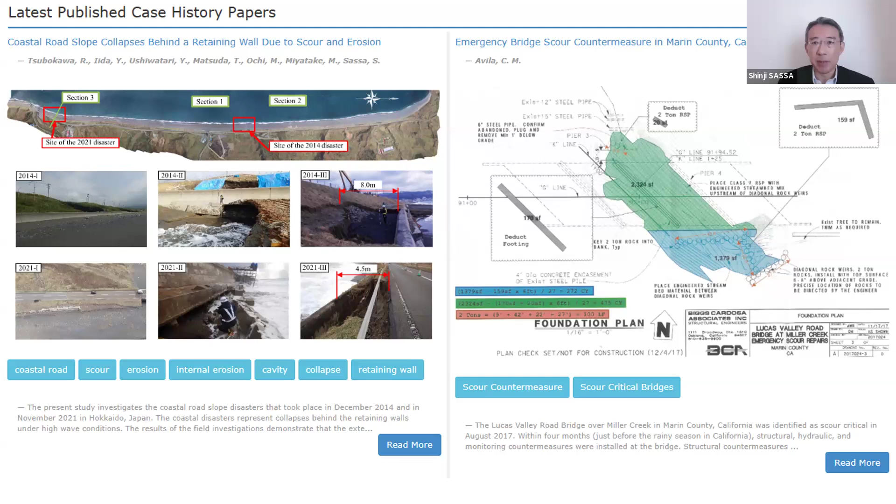Harris et al. presented scour prediction in cohesive marine soils. A hybrid approach was presented, combining field data with laboratory soil erosion testing. As for the laboratory and in-situ soil erosion testing, Mabel will talk about this topic later. This hybrid approach combining field data and laboratory erosion testing led to improved evidence-based scour estimates that benefited offshore foundation projects.

Shan et al. presented combined geotechnical site investigations, laboratory element tests, hydraulic flume tests, and advanced numerical modeling, leading to a more cost-effective design of foundations in a bridge replacement project in the USA.

For the new initiative of the ISSMGE GeoEngineers Without Borders, briefly explained in this slide, all TC members agreed and would be happy to contribute to this new initiative when such incidents occur worldwide pertaining to scour and erosion. Is it okay, Marc?

Yes, okay. So the idea—yeah, and this is not only for you, but all our viewers and all the TCs, hopefully they're watching.

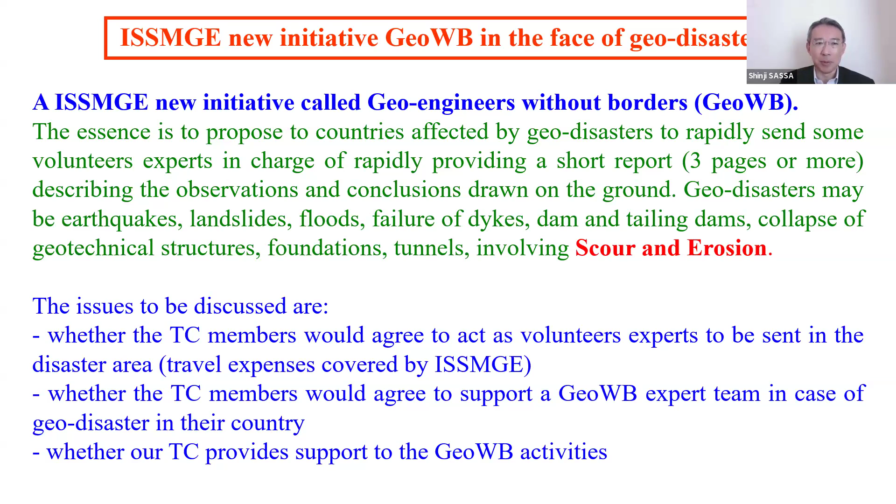Thank you, Mark. I would now like to talk about some recent advances in the mechanics and countermeasures of scour and erosion from my own keynotes that took place in September last year, and also former ones.

Here I'm showing the effect of overflow and seepage coupling on scour. Tsunami, overflow, and seepage coupling actions induced scour of the mound of caisson breakwaters, as well as the seabed ground, causing bearing capacity failure, leading to flow of the mound, and resulting in total failure of the caisson breakwater, which otherwise remained stable without the coupling effect.

Without seepage, overflow-only induced scour did not lead to destabilization of the breakwater. However, the coupling actions of seepage and overflow led to total failure of the breakwaters.

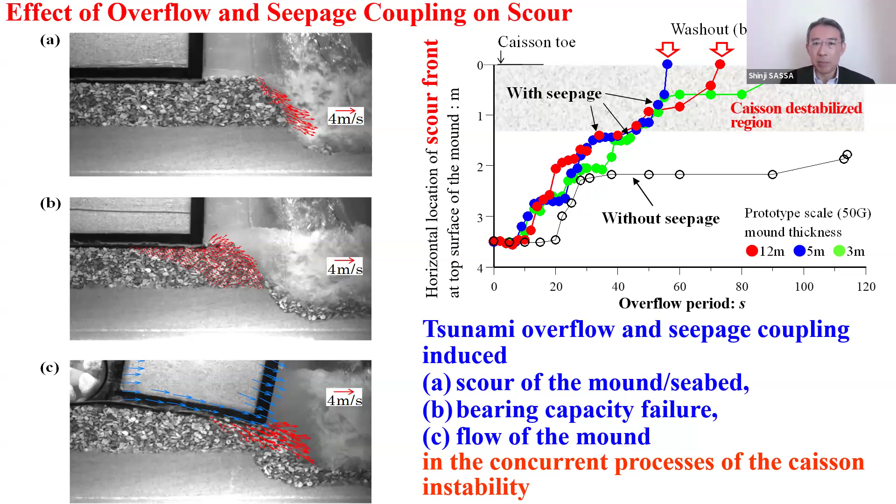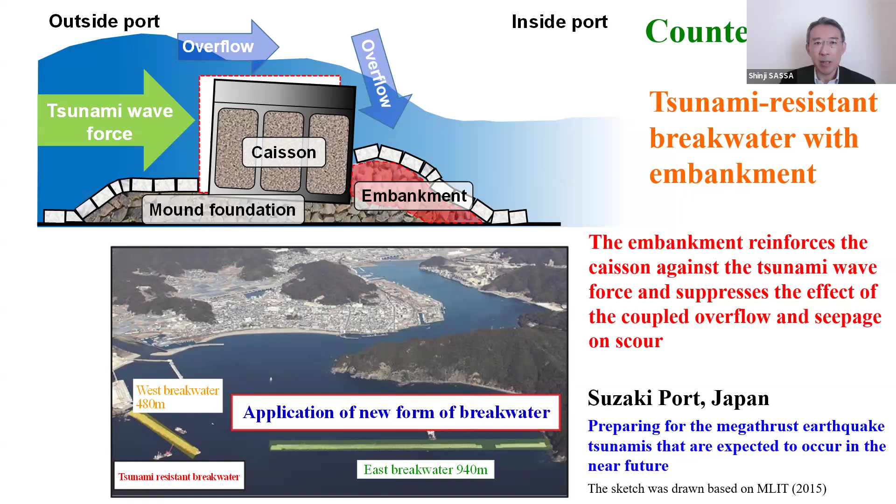Such new knowledge has been utilized for the design of tsunami-resistant breakwaters with embankment, where the embankment reinforces the caisson against the tsunami wave force and substantially suppresses the effect of coupled overflow and seepage actions on scour of the breakwaters. Such structures are for preparing for the megathrust earthquake tsunamis expected to occur in the near future, particularly in Japan, and also in the Pacific Ocean.

Erosion research has led to a groundbreaking discovery on fundamental soil mechanics, that is porosity of sands. Sand relative density normally changes from 0 to 100%. Here, the dynamics of suction at waterfront areas subject to cyclic exposure and submergence undergo a remarkably wide range of sand porosity evolutions—over 200% variation in terms of relative densities achieved, ranging from very dense to very, very loose, such as giving rise to bubbly sands seen across the globe, as shown on the left of this slide.

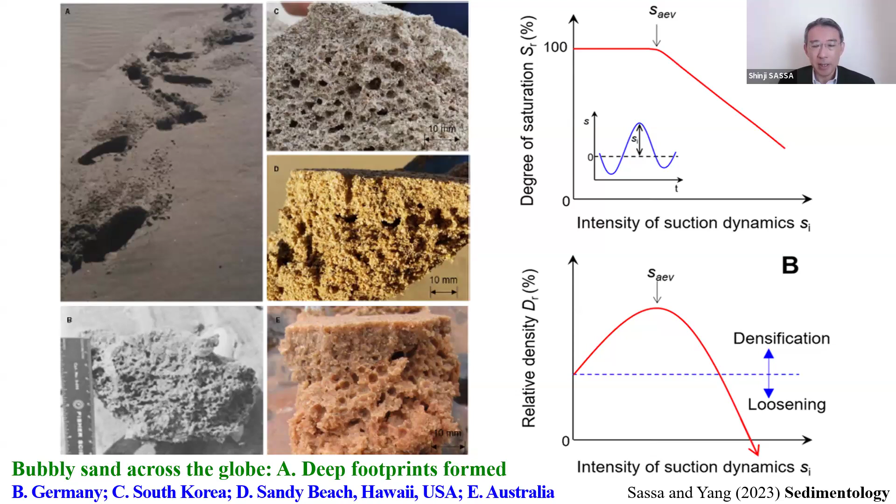Such new knowledge has also been used for novel engineering design of coastal land reclamation. The top right figures show that, in the 3 months following reclamation, the coastal reclaimed land underwent dynamic movement under waves and currents.

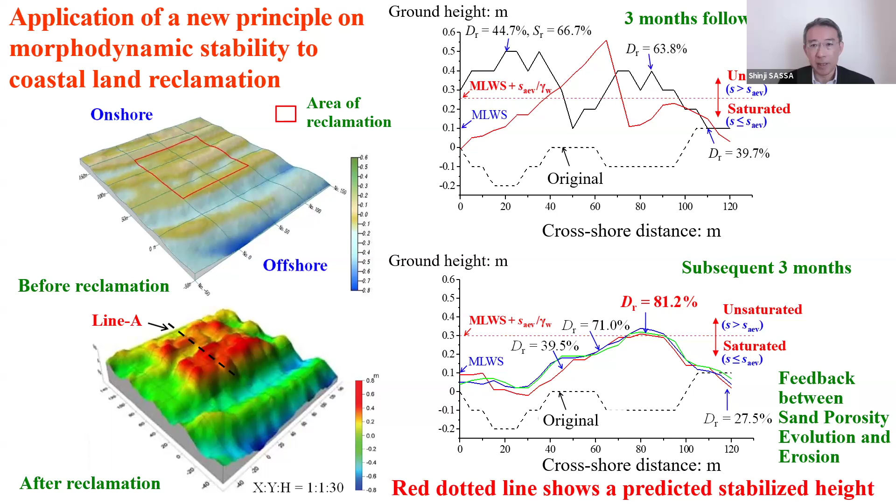However, the situation substantially changed in the subsequent 3 months: the coastal reclaimed land became distinctly stable, owing to the feedback and interplay between sand porosity evolutions and erosion. The red dotted line shows the predicted stabilized height based on the developed analytical framework, which accounts for the interaction of such hydrogeodynamic effects and processes, shown to be consistent with observation.

Another important facet of scour and erosion is internal erosion. Here I'm showing cavity collapses seen across the globe behind seawalls. The photograph on the bottom left shows the site of a fatal accident where a cavity formed in the backfill behind the caisson and suddenly collapsed without giving any alarming signs at the soil surface, leading to a fatal accident on site.

So the prototype scale visualizing system allows us to...

Can you go back one slide? One slide, okay, this one? Okay, yeah, they look like sinkholes.

And look what I noticed. If you look on the left picture at the bottom, you see one. The depression happened at the joint of the caisson. The caisson joint has some defect, and through this caisson joint, sand migration occurs.

Then the cavity develops above the groundwater level because the sands are inherently cohesionless, so no suction, no cohesion. But above groundwater level, sand has apparent cohesion due to the development of suction, so a cavity can stand by itself above the groundwater level. So the cavity gradually grows and develops around until reaching about 2 or 3 meters, then sudden collapse.

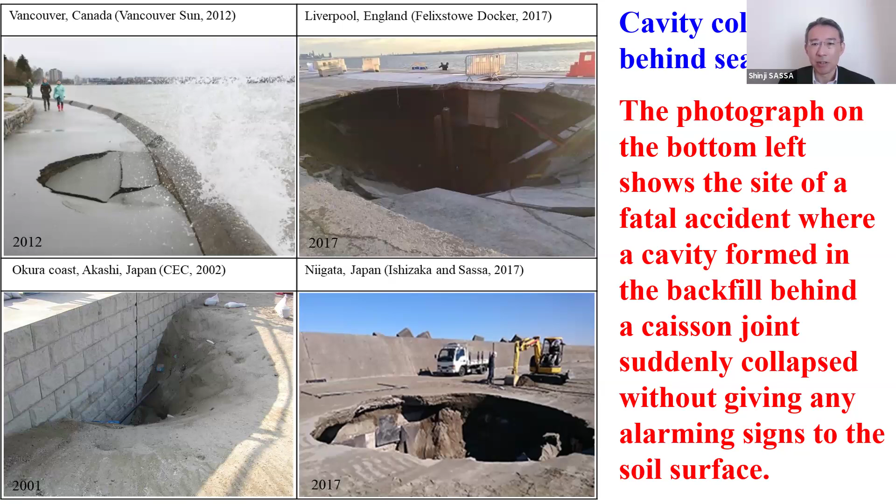And it suddenly collapsed without giving any alarming signs to the soil surface. So the fatal accident occurred. This occurred worldwide recently, so I'll touch upon it later.

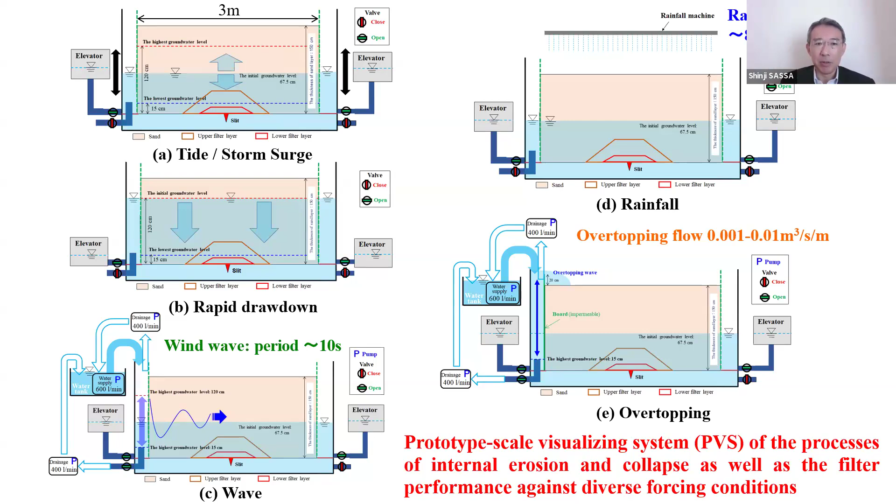For such incidents, the prototype scale visualization system allows us to see the cross-sectional view of the entire soil, including the cavity, and to investigate the simultaneous processes of internal erosion and collapse, as well as examining the performance of countermeasures such as filter layers against diverse forcing conditions involving tides, storm surges, rapid drawdown, waves, rainfalls, and overtopping.

This led to novel filter criteria for preventing internal erosion against dynamic forcing conditions. The criteria have proven effective in ensuring the safety of important infrastructures such as airports, revetments, quay walls, and sea walls, as well as sandy beaches, both natural and artificial, that led to recent fatal incidents worldwide.

But these filter criteria have suppressed and prevented the occurrence of such collapses under diverse forcing conditions that involve waves, tides, seepage flows, seismic motions, overtopping, and rainfalls. So in our TC, the cross-disciplinary integration of hydraulic and geotechniques has indeed played a vital role in advancing the field of scour and erosion, which pose significant risks to infrastructures as well as to human beings.

That's all for my summary of our TC, followed by the three eminent researchers. That's all for my talk. Thank you.

Mark, do you mind if I pose a question? Okay, yes, of course, go ahead. Yeah, of course. Hi, Shinji.

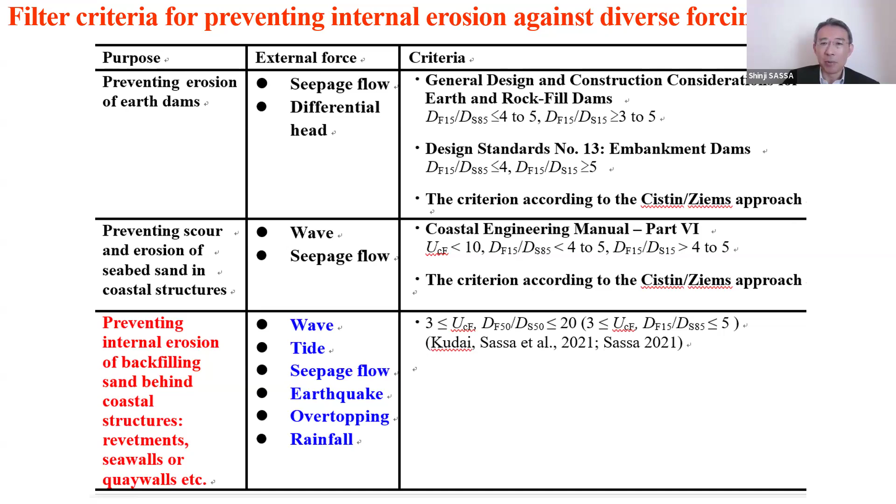This was published in Coastal Engineering in 2021. So, Tiago, you can have a look at our paper that was published in 2021 in Coastal Engineering.

Yeah, because it could be interesting, for example, in a lot of the studies we do on the filter interaction with the upper armor layer of scour protections, and particularly in those riprap solutions, because often we have a lot of problems of filters. Please have a look at the 2021 Coastal Engineering paper.

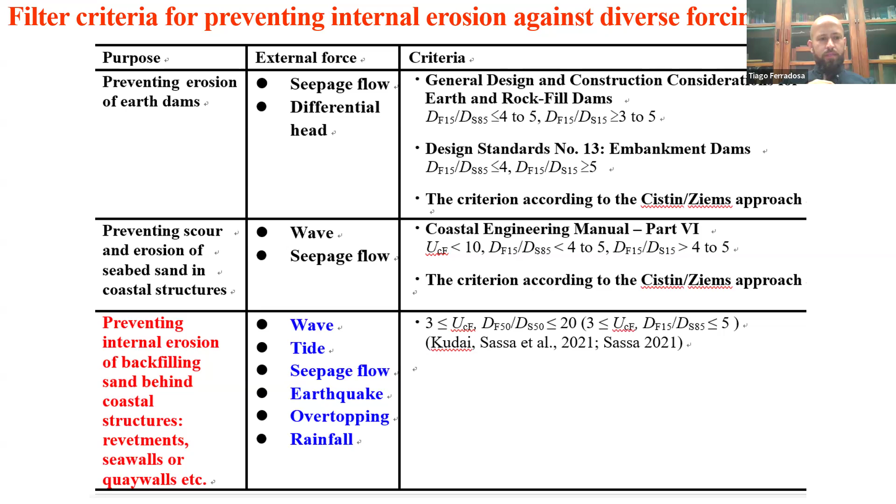Very interesting, thank you Shinji. Thank you. This is very nice, Shinji. I'm impressed by how active your technical committee is.

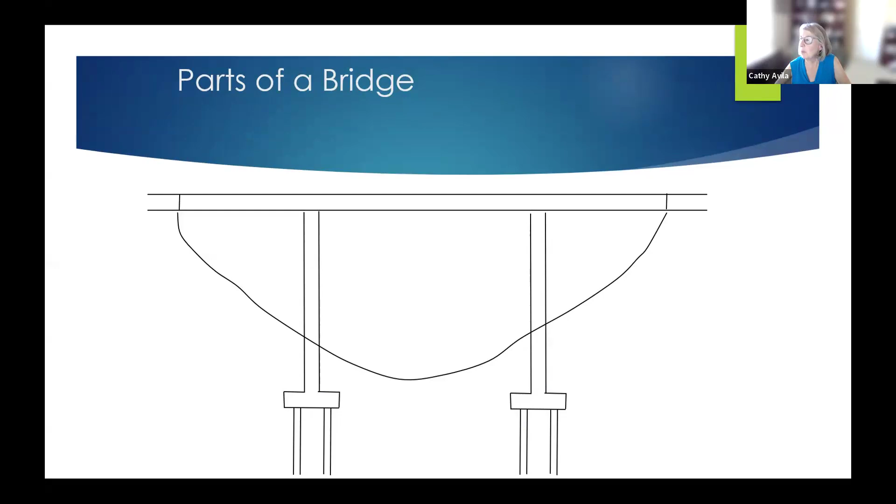We'll just talk about the parts of a bridge. So we'll start out with here's the deck, the pier, the footing. Sometimes we have piles, sometimes we don't. Generally we call it a spread footing, not on piles, but sometimes they'll just call it a footing. This is our abutment 1, pier 2, pier 3, abutment 4. That would make that span 1, span 2, span 3.

So now that we're all bridge engineers, we're going to talk about abutment and abutment washouts. If we look here at the abutment on Interstate 10, what we call Tex Wash, we can see an abutment scour failure. This bridge actually had quite a bit of rock riprap around it protecting it, but the abutment was founded on spread footings on alluvial material without any piles underneath it, so it had some vulnerabilities. This fell down probably about 5 years ago, and all the bridges on I-10 that had similar features are being retrofit at the present time.

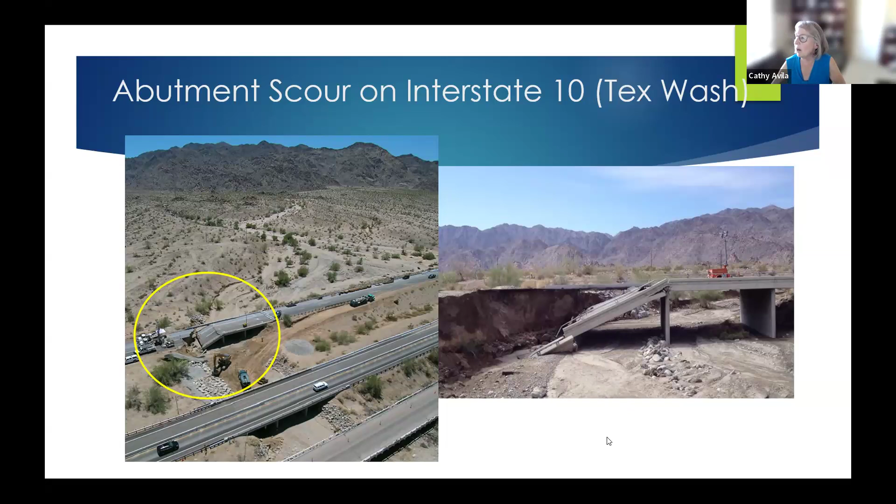I'm going to talk mostly about the atmospheric rivers that California experienced in March of 2023, and specifically I'm going to look at a couple of projects in Tulare County. Tulare County's down here. If we looked at Fresno, that is the centroid of California. If you kind of put your finger up on a map of California and spun it around, you would see that the literal center or centroid of California is somewhere in Fresno. So we're just a little bit south of there. In general, Tulare County has 2/3 of its area in very mountainous areas and about 1/3 of it in flat land, a very big agricultural area. This shows a map of the damage sites that occurred in that March storm event.

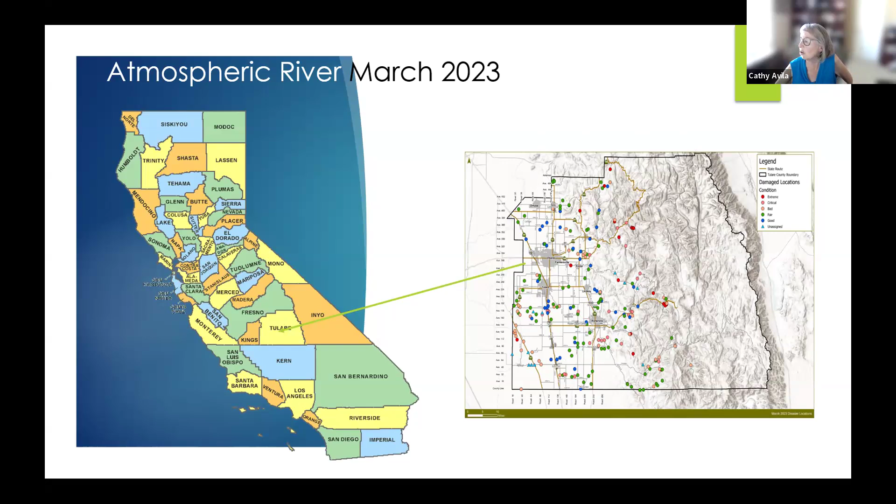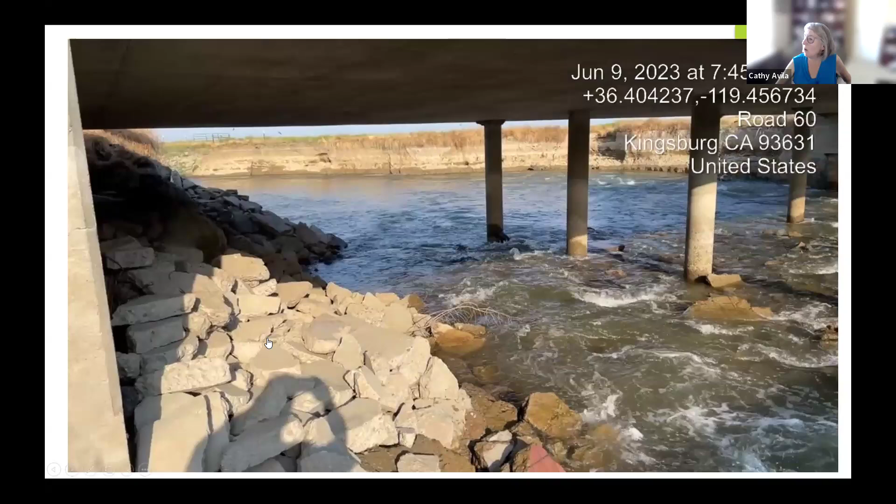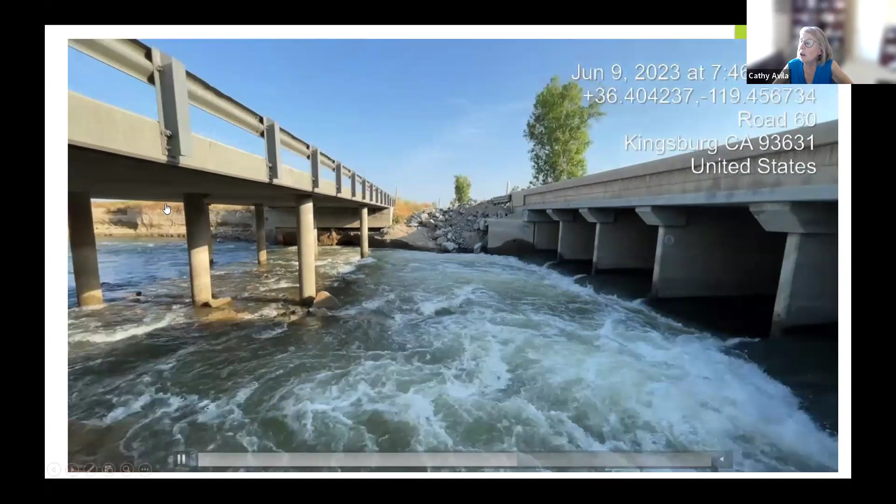Going to start with the Road 60 on Cross Creek. We're almost to the flatlands here with Cross Creek. If we show a quick movie, what we see is some broken concrete riprap over here at this abutment. But let's look at the opposite abutment, because that's the interesting one. So if we zoom in here, we see these abutment piles, and we see the erosion going on along with the almost vertical embankments over here.

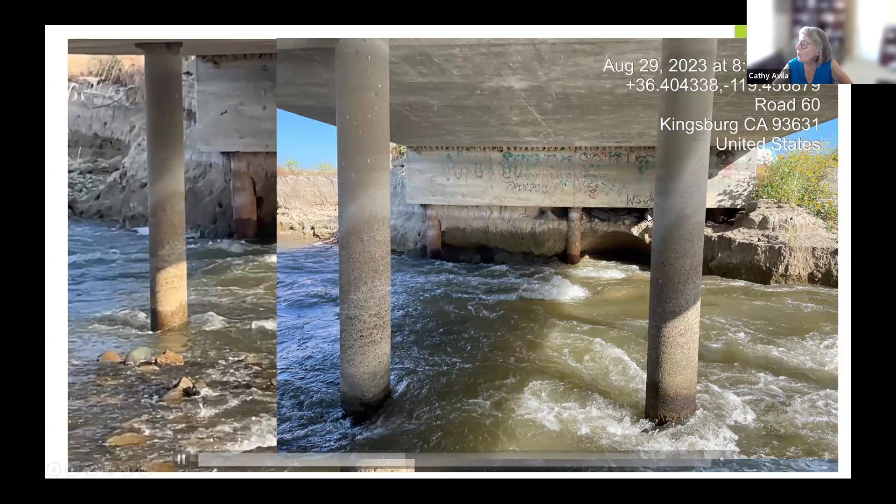What did we do about that? Well, here's a nice still photo after the event had stopped, and we see the piles, but we also see something quite alarming out here, where we can see some daylight under here. And as Dr. Sassa just talked about, sometimes you get some catastrophic failures that you can't see. This was fortunately a case where we did not get a catastrophic failure and we could see it. So this is somebody standing on top of the ground up here. You never want to see cutouts in your asphaltic concrete. You really don't want to see big cutouts in your asphaltic concrete.

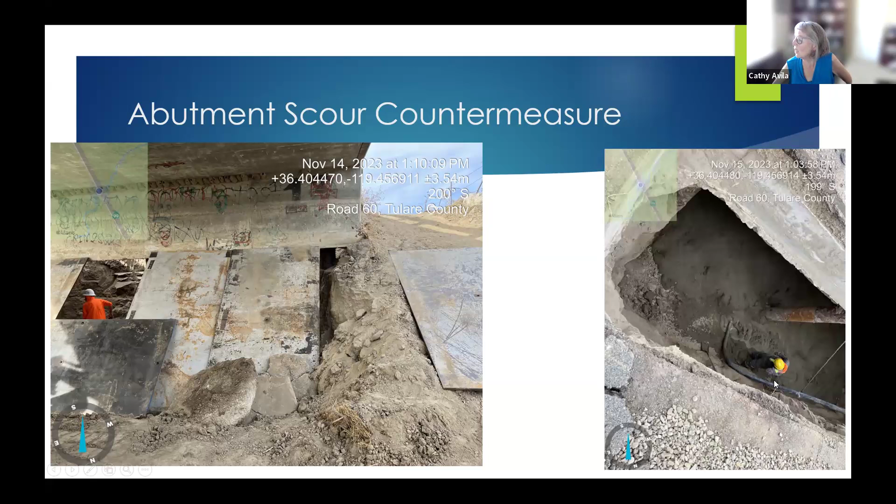Here's the piles that are going down, and you can see the water. They shut down the road and did a scour countermeasure. We can see our person scale here. They put some plates on to a slope, and if we look down, we can see our person scale here. They floated some concrete. There's our pile underneath that abutment, and here it is as it came up. And finally, when all was done, they pulled the forms, and we had a pretty robust abutment scour countermeasure.

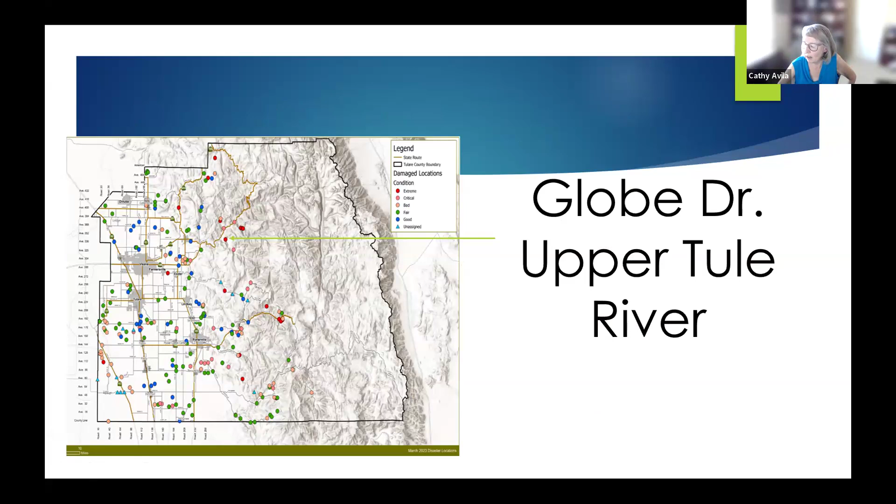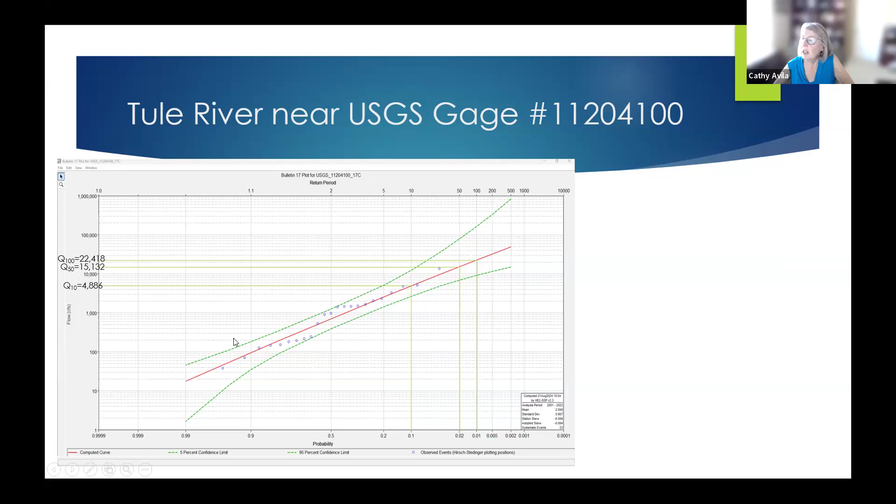The next one we're going to look at is going to be Globe Drive. This is the Upper Tule River. Get an idea of what kind of recurrence interval we had for this event. We looked at a 17C plot of the gauge, and what we found was that there was 13,400 CFS that occurred, peaked in March 10th. For those of you who don't speak English, that's 380 cubic meters per second.

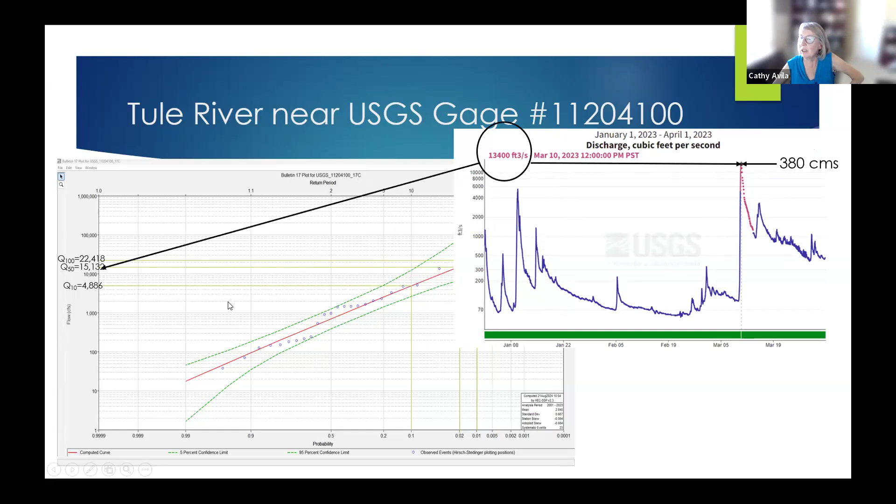And that was just under a 50-year event for that particular gauge. So we're not talking necessarily a really huge event, but nothing too small either.

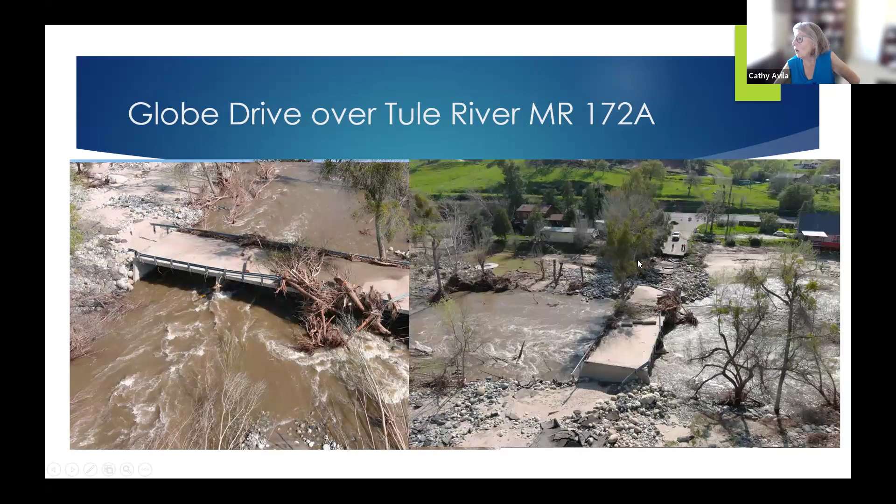Are those roadway embankments still vulnerable to scour? Yes. But in general, there's not a very large ADT out here, average daily traffic. So when there are large flood events, people don't tend to be on the roads out here.

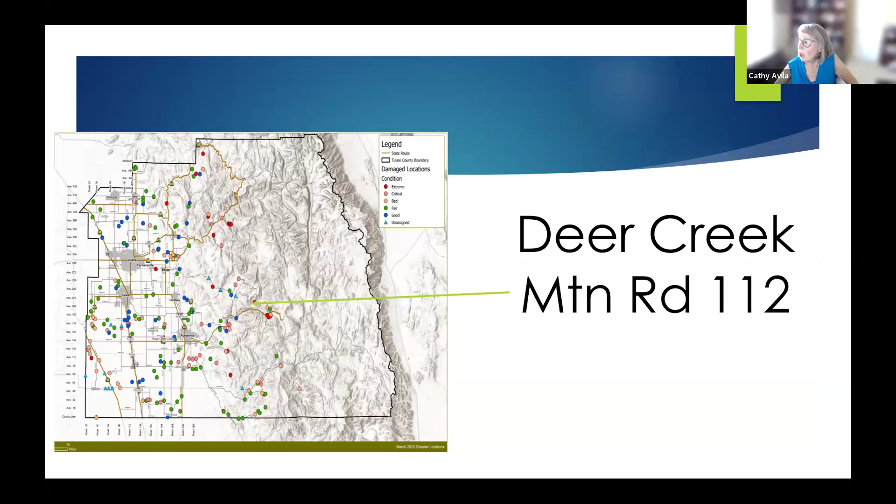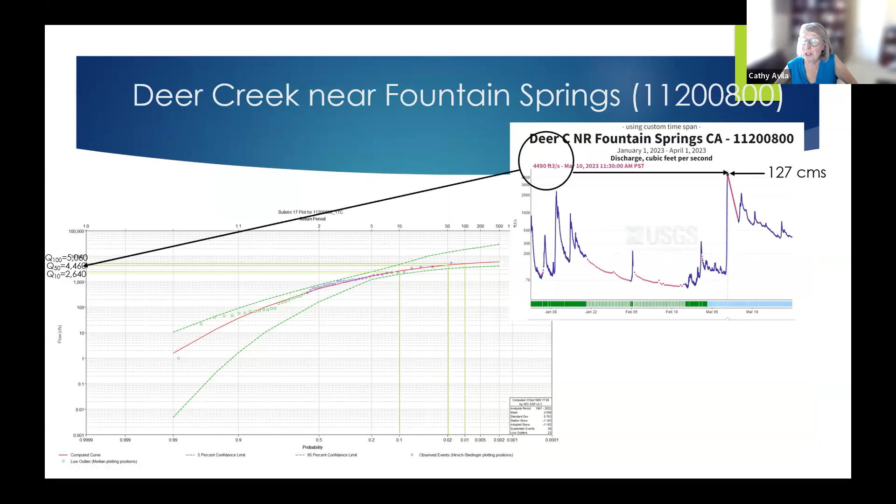Third example, Deer Creek on Mountain Road 112. Again, we had the joy of having a gauge out here from the USGS. About 4,500 CFS was our peak, 127 cms. That really was a 50-year event. So we're finding that at least up in the mountains, we had about a 50-year event.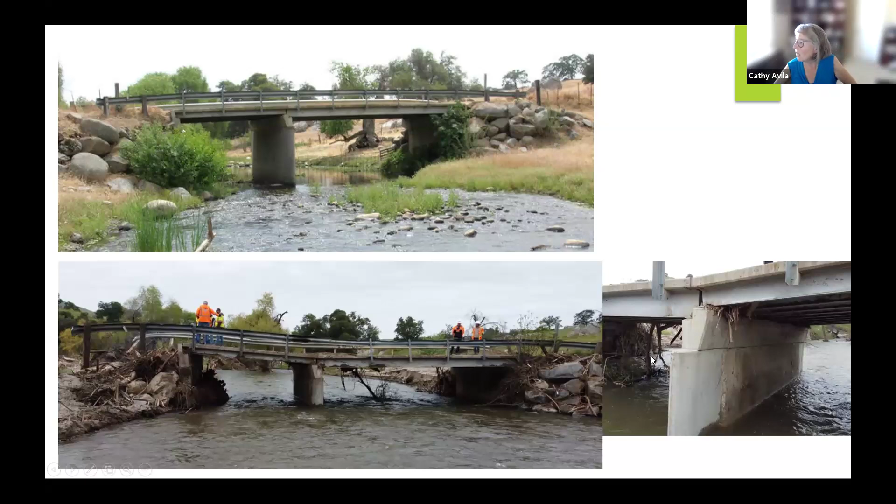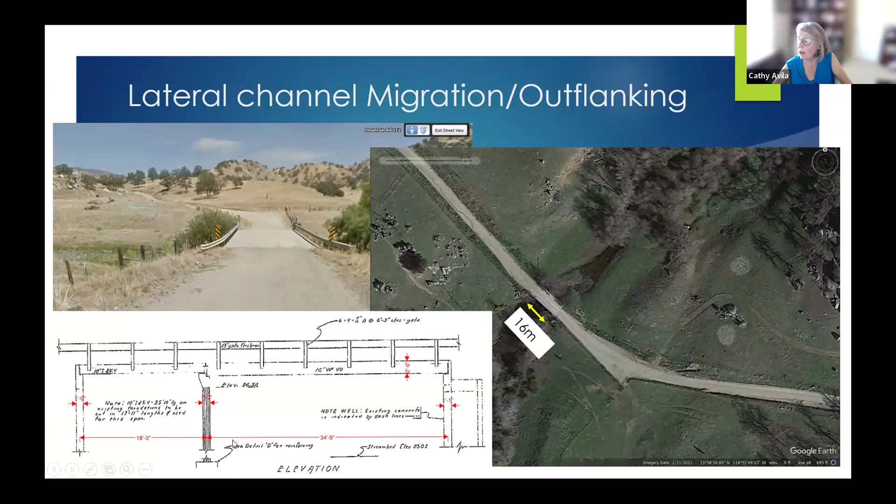This lovely bridge here is a 2-span bridge, span 1, span 2, and it didn't look so good after the flood event. If we look, we can see that deck looked pretty cattywampus after the flood. So we had some pier scour. But the bigger challenge, looking at this not-very-long bridge in plan view from Google Earth, we see it was 16 meters for the old bridge. And that old bridge had a pier founded on alluvial material, nothing bedrocky about it.

And here's what it looked like after the flood event. That went to a 67-meter wide channel. And maybe because there was some debris caught up in the bridge, it outflanked it. We don't know for sure.

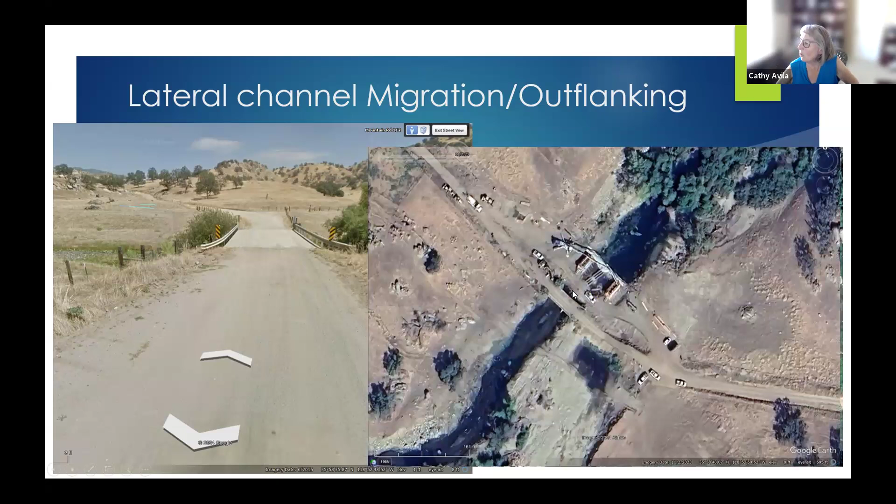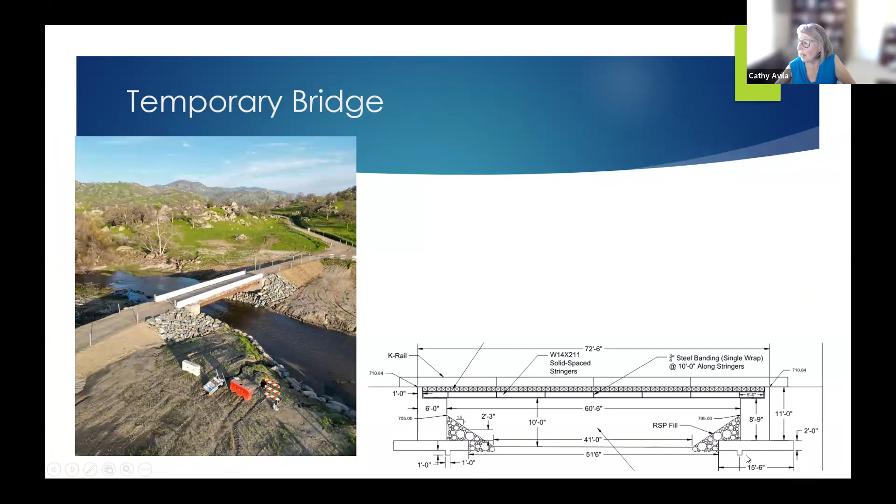There was a temporary bridge that was put in, only 18 meters. That temporary bridge looks like this. We can see some rock riprap around the embankment. If we look at the as-built plans for that particular bridge, we do see that it does have spread footings without being on any piles. So it has some vulnerabilities, but it is a temporary bridge, not expected to stick around for a heck of a long time.

And we also see that the channel and roadway profile coming up to it, the embankment fills which you can see here, are blocking the flow and causing a bit of backwater upstream, more on this side than that side.

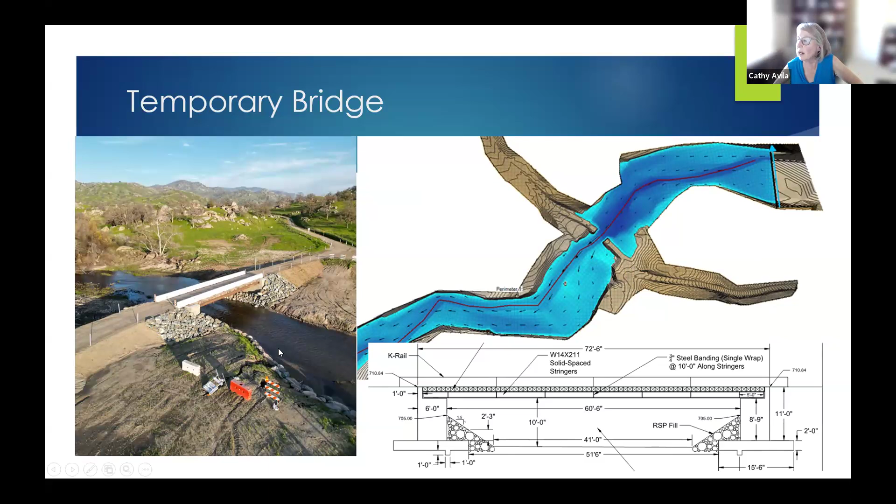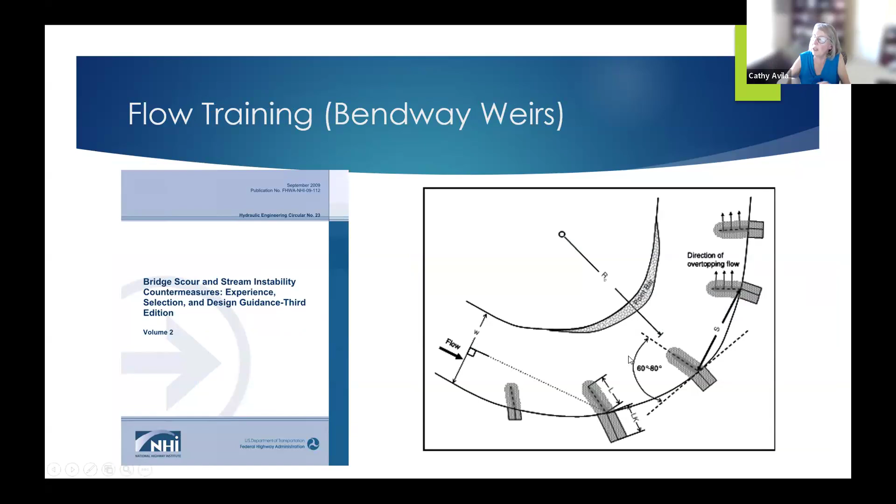There's been a lot of excellent guidance put out by the Federal Highway Administration, FHWA, on protecting abutments from scour. Riprap has been the historic approach. Also looking at flow training works, bendway weirs and the like, in order to try and convince Mother Nature to go in the direction we want her to go in and not outflank the bridge. So that looks like that in real life.

There are 3 publications used for scour in the US, and I know they're also used outside the US. Those are actually being updated, so we're looking forward to that. First, the 2012 publication of HEC 18, Evaluating Scour at Bridges. This is going to be the last one to be updated. I understand it's about a year out from being updated.

The 2012 version of HEC 20, Stream Stability at Highway Structures, should be updated next or shortly. And finally, HEC 23, Bridge Scour and Stream Instability Countermeasures. That one has already been updated. Some advanced copies have gone out, and that should be coming out to the Federal Highway Administration's website, which you can use to download any of their publications.

I don't know if you guys have any questions.

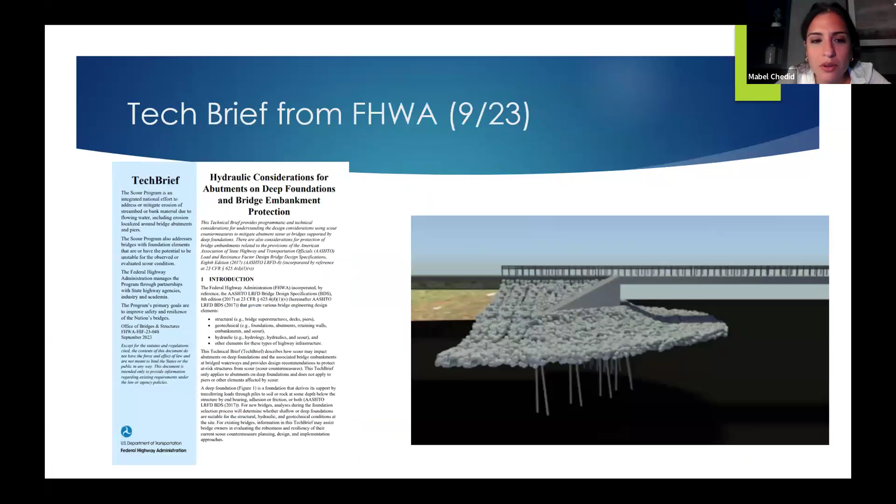Cathy, I have one question. The Road 60 in Tulare County, when we saw the daylight behind the abutment, was that a slope stability failure of the embankment?

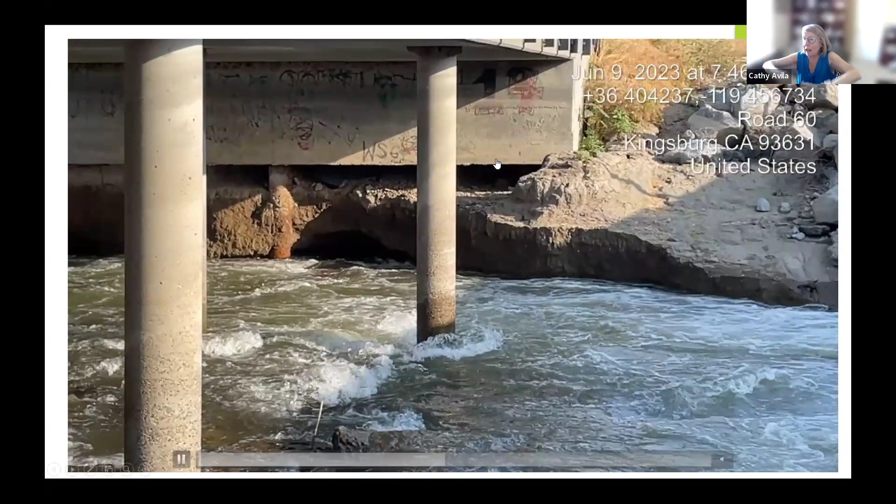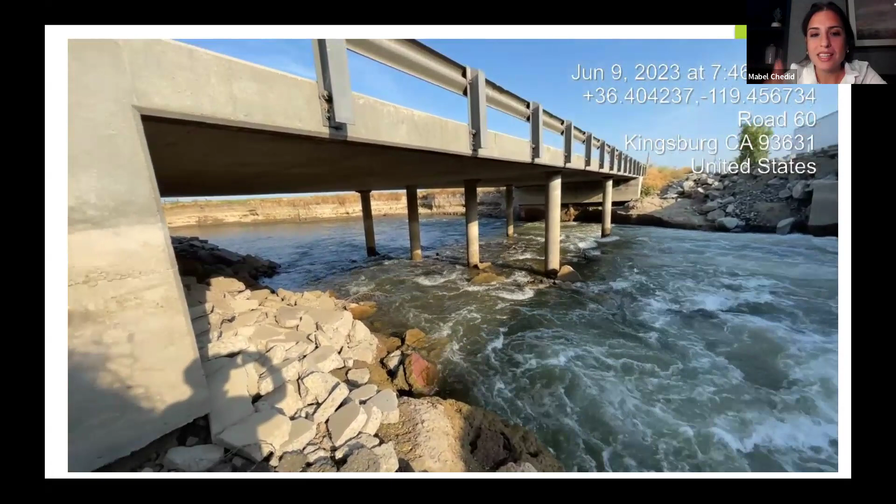I think it was more of an erosion failure. If we look at the movie, what we actually see is erosion, Mother Nature eating away from the bottom, and then basically you're eroding the toe, dropping that soil in, eroding the toe, dropping the soil in again.

It's a type of local stability failure, because eroding the bottom means increasing the height of the embankment and making the slope steeper, so it would slough and you'd lose big chunks. That's very interesting. Cathy, thank you so much, you and I connect by being both practitioners, so I really like your examples.

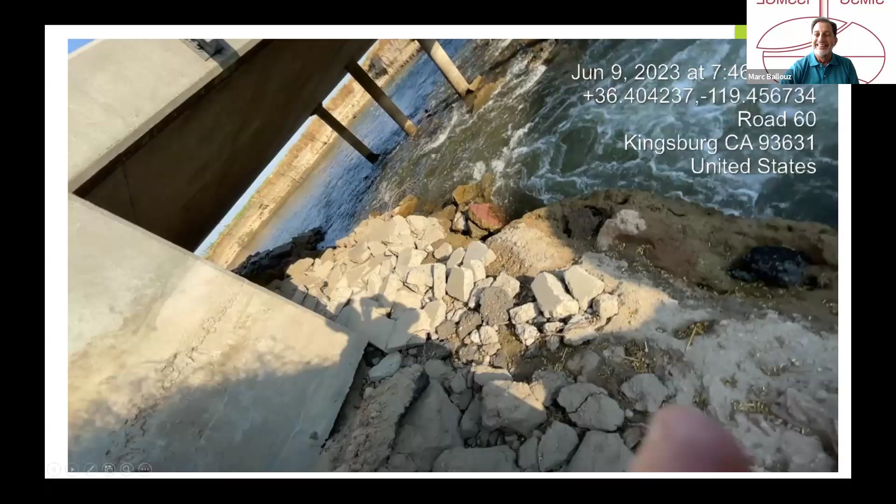Hi again, Marc. Let me check if I can share my screen. Share your screen with big slides. I guess you're seeing them now, correct? Perfect, yes. Sorry, you guys, I lost my slide here. Why aren't... should you start from the beginning? You're starting with the last slide. Apologies, Marc. They are the same slides. Okay, thank you. There you go.

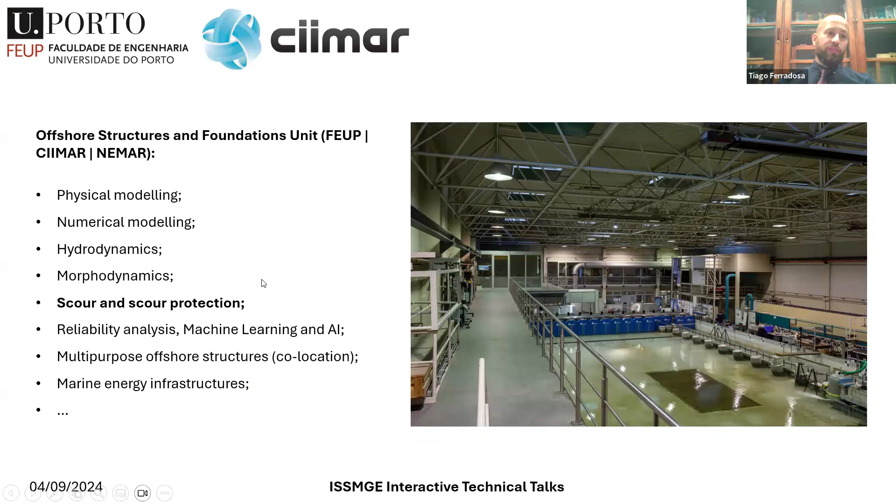Now, here we go. So we are the NEMAR group, the marine energy group. The scour problem, as Shinji already pointed out, is a mixture between geotechnics and hydraulics. We deal a lot with hydraulic problems, one of them being scour and scour protection, with a lot of physical modeling and numerical modeling, including for industry applications, but also in research and academia.

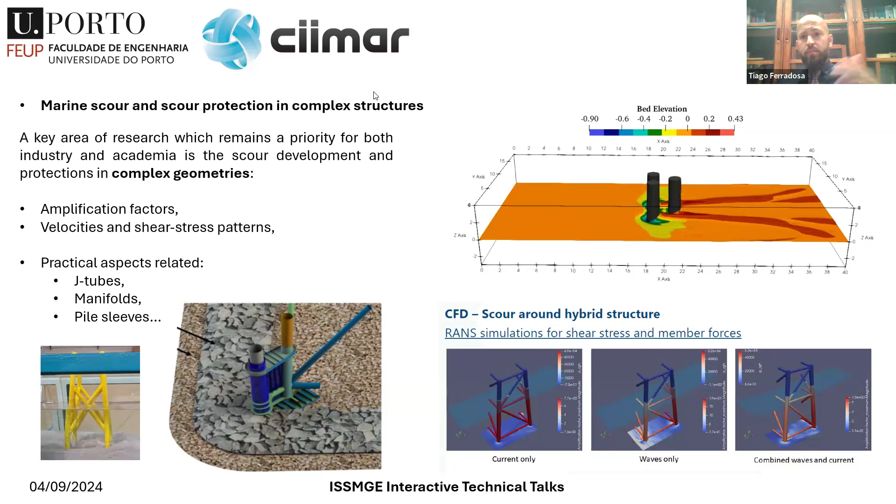One of the challenges that remains key for the upcoming years is complex geometries. This is important because with the growing offshore wind market, the novel marine energy structures being placed at sea, or at least studied, and demonstration projects on such structures imply a lot of complex geometries. When you jump into complex geometries with complex flows, combination of waves and currents, tidal velocities, and so on, it becomes really difficult to make predictions on scour and to understand the problem itself. This would be one of the challenges I'd point out, with major developments still to be made in the upcoming future. This includes J-tubes, pile sleeves in jackets, crossing cables, manifolds, so you can imagine all these structures with complex geometries and complex flows.

Why is that a big problem? Because unlike the methodologies published for bridges and so on, in offshore engineering the methodologies, norms and standards for scour still lack development on a lot of these tricky situations. We know a lot about scour on monopiles, how to deal with them, etc. We try to convert a lot of these complex cases into equivalent monopile cases, using factors to account for the transparency of the structure, or trying to account for the amplification factor that might be higher than in a simple monopile, but there are no set-in-stone rules, if one can say so.

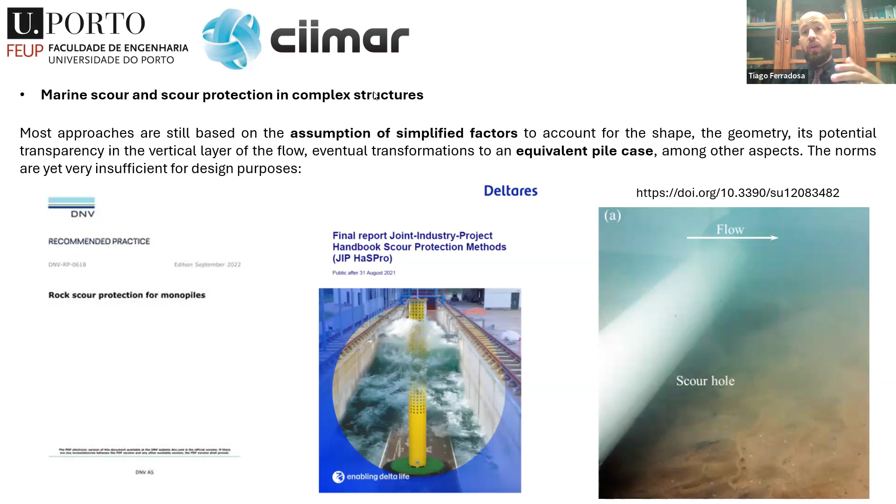It's a bit of a gray area where the designer's experience is worth a lot, and physical modeling is required. This remains a big problem, and the challenge of complex geometries and complex flows is very much the basis of the need to advance standards and norms. We apply a lot of knowledge from fluvial environments, but it's still not enough to account for all the problems. With the growing situation in offshore wind, but also aquaculture in offshore locations, tidal energy, wave energy, we start to put more and more structures in place.

We start to look for co-location of these structures, perhaps aquaculture with offshore wind, or wave energy with offshore wind. This means we have moving elements around fixed or sometimes floating foundations, where the cyclic movement of the cables can induce liquefaction or increase scour at the anchors, depending on water depth. If it's not too large, that scour can be neglectable.

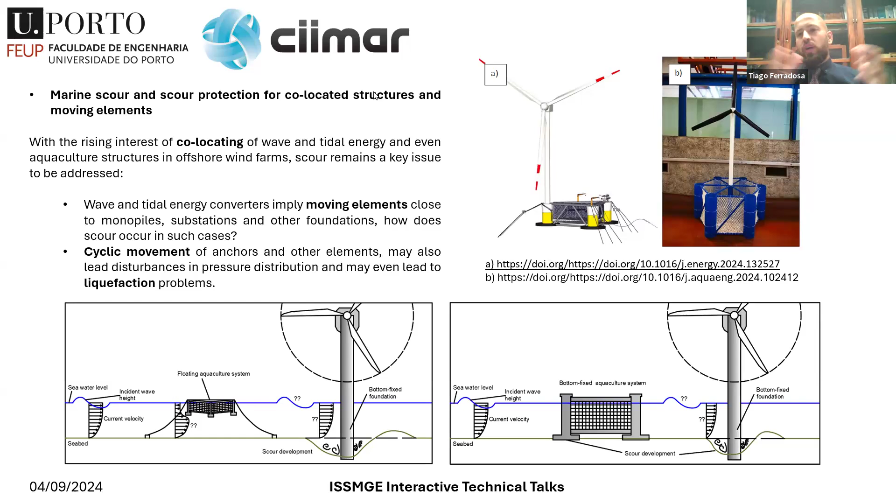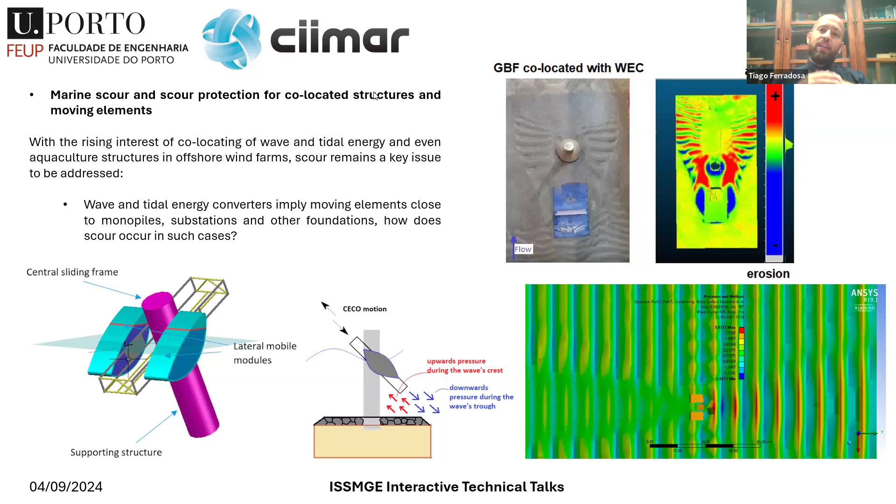With this increasing complexity and added co-location of structures, scour becomes a huge problem. One of the most recent cases we studied is the combination of wave energy devices located at the bottom, and how the scour patterns and amplification of shear stresses may change around the monopile for an offshore wind turbine or gravity-based foundation, how the pressure or velocity columns in heights can change, and how pressure can change upon the armor layer. All these things pose numerous uncertainties on top of the problem, so that remains a key challenge.

Additionally, to make it more complex, we want to look for novel concepts for scour protections. Why? Many are related to the need to enhance biodiversity, some relate to avoiding plastic systems to prevent microplastics at sea. For example, we want to protect a structure from scour using artificial seagrass, but made more eco-friendly, with eco-friendly materials and shapes. All of this changes roughness, interactions with flow, geometry, and material. These novel concepts, though some proved useful and nature-friendly, are still very uncertain in their performance. This is another challenge we still have a lot to do on.

If you want to look at recent developments and novel concepts on this, the paper we present below provides a summary, a very recent one.

We also need a lot of physical modeling to study these complex situations, to quantify damage at scour protections. But to quantify damage, we need better methods, new techniques, better testing—so another challenge is the actual quantification of damage. Here's a small example where we look at ripraps with dynamic equilibrium, which can have a little movement, but not so excessive that it exposes the filter layer. This methodology was introduced by Den Boon some years ago. The criteria was that filter exposure could not exceed the equivalent size or area of a 2x2 stone square for the armor layer.

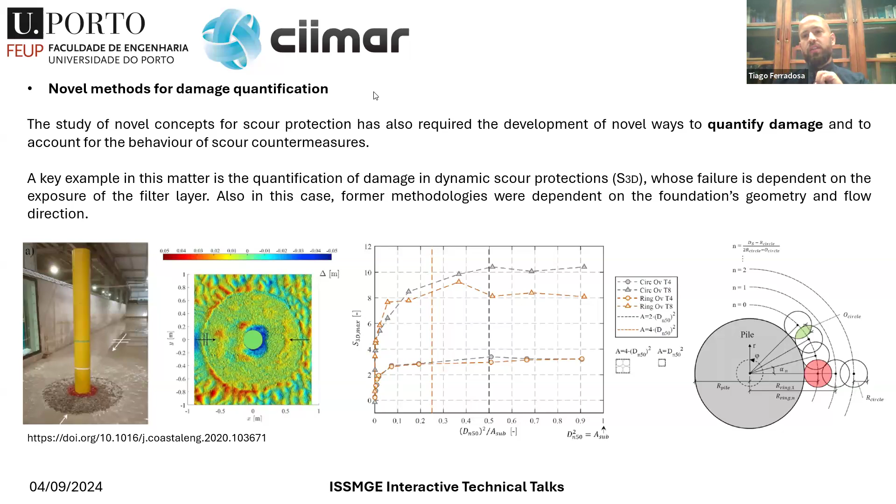We recently developed and have been studying this method. It has a probabilistic background combined with physical modeling that actually proved the visual criteria introduced in former days was correct—the damage evaluation at dynamic scour protections, the failure criteria, tends to stabilize at that value. This means there is still a lot to be done concerning academic research on methodologies to quantify damage in physical models, which we often use for industry offshore engineering cases.

For the design itself, we keep struggling to improve our design and the norms. A key area of research lately has been probabilistic-based design methods. What's the problem? Scour is such a random process, and scour protections like riprap are so random in nature that it's not the same as designing a concrete slab or a pile where you know the resistance is X and the momentum shall be Y or Z. For such a random process, it's very difficult to provide probabilistic-based design methods, but this has been a key research area—still early, but developed a lot lately with AI models, machine learning techniques, and so on.

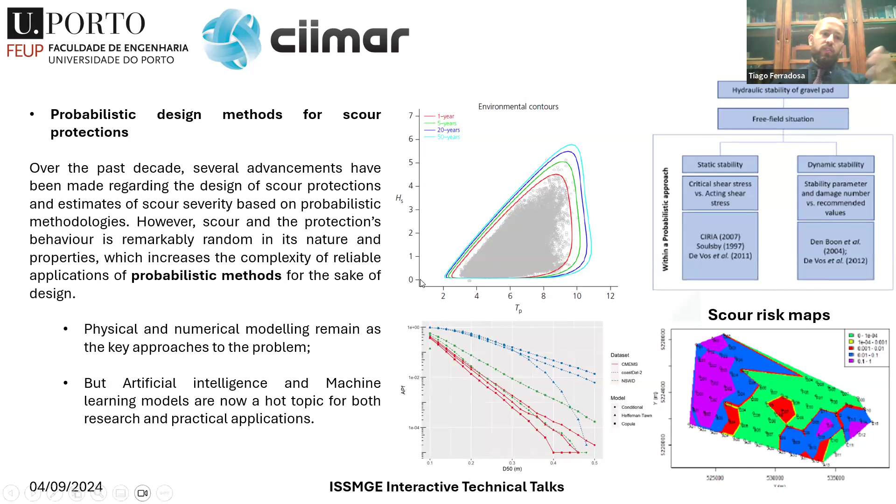Still combined with physical and numerical modeling, there have been recent contributions on the relationship between the probability of failure of a scour protection concept and the variables that control the scour process and mechanism. In some cases, we can even use those methodologies to develop scour risk maps, as you would do for a set of bridges or piles, or for offshore wind farms, wave energy farms, or aquaculture farms—any structures placed at sea repeatedly in the same location. That's another challenge that could prove quite useful in practical applications.

Another area that's been developed a lot lately is the study of the interaction between the soil, the structure, and the flow, but also the scour protection and the structure itself, including the flow. The way the scour protection can add or change the stiffness at the interface between the soil and the structure is something we've seen a lot over the last three to four years in offshore engineering research. There are even studies on how scour protection may add stiffness to monopiles, resulting in more vibration in the natural frequency than expected. So there's a lot to be done in this matter as well.

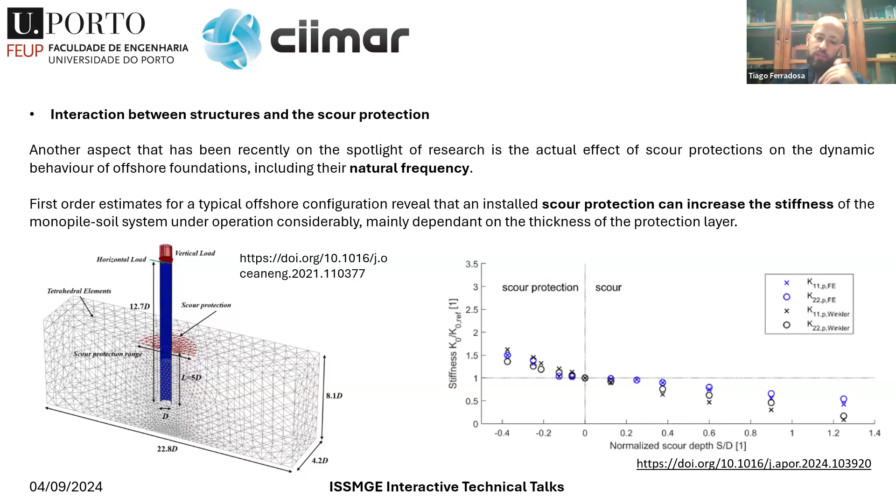Still on numerical modeling, and this is almost the final challenge I'd like to highlight in offshore engineering: the actual numerical modeling of scour protections itself. We do a lot of numerical modeling of scour with waves and currents, so that's pretty well established—there's always something new, but it's well studied. But when it comes to studying the protection behavior itself—not only the pore pressure inside it, but also the movements of stones in the armor layer, failure mechanisms, erosion, flow slide at the armor layer, or edge scour—it becomes very tricky because it's time-consuming and requires a lot of computational power. This is still an area lacking developments, and we expect it to grow in the upcoming years.

A lot of the publications we've seen try to combine a porous media approach with single sphere modeling, dividing layers of the scour protection between these two types of modeling, but there's still a lot to be done. It's a problem that may see a lot of development now that computational power is no longer as big an obstacle as it used to be with supercomputers. Nowadays, universities are doing a lot of work on this.

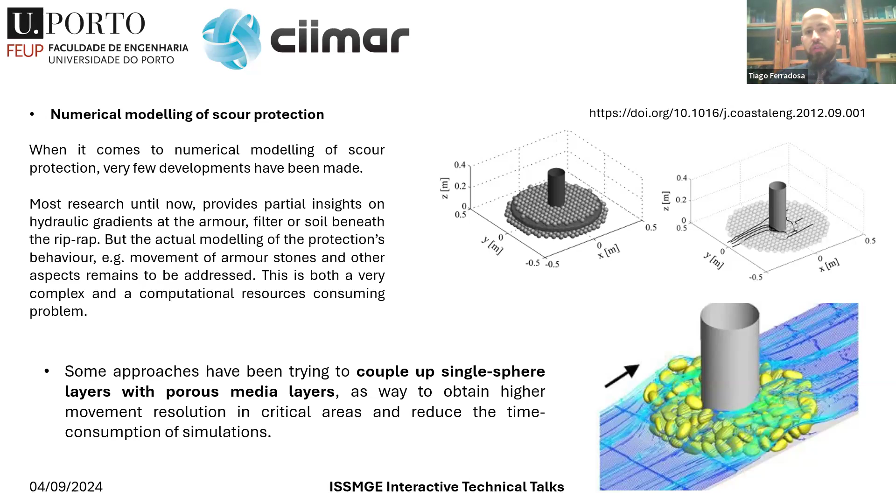Now, with all these nice problems and complex situations, we still don't know a lot of things that go back to the basics of scour. In the last TC213 conference, held in Denmark, one key idea was that we still have a lot to do on turbulence effects, scouring in layered or mixed soils, and scouring in cohesive and non-cohesive soils. So a lot of things that go back to the basics of scour still need research, and these are actually the basis for all of these problems. So if you guys want to get into scour research or scour practice in the industry, I'm pretty sure you'll have a lot to do in the upcoming years.

Wouldn't you say so, Marc? Thank you.

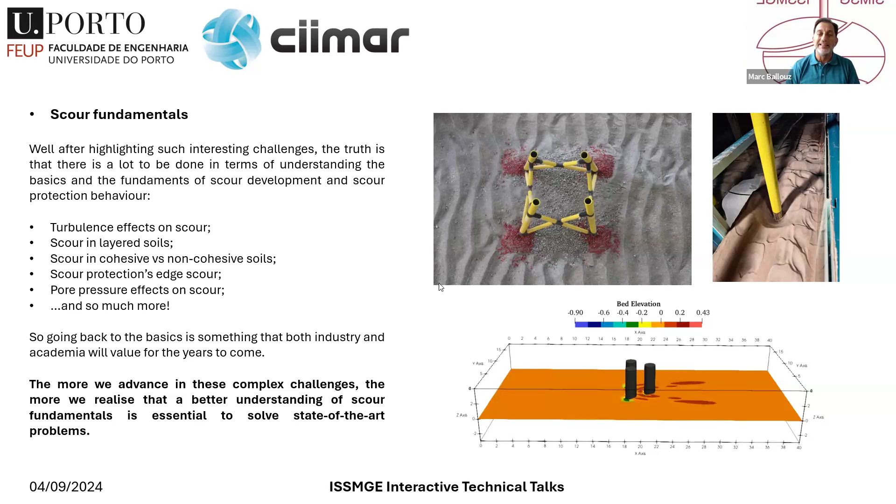I really like your conclusion—the more we know, basically, the more we know we don't know. Very true, that's nice. Very nice presentation, Tiago.

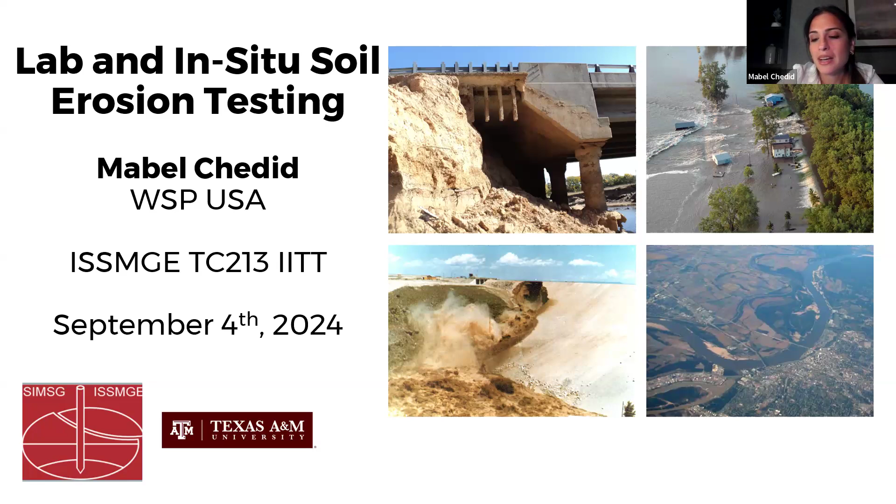I worked on the topic of soil erosion and bridge scour during my PhD years at Texas A&M with Jean-Louis Briaud. We tackled together many soil erosion problems, including bridge scour at abutments that Cathy covered. We did levee overtopping, internal erosion of earth dams, and meander migration. We always found that soil erosion testing, the topic of this presentation, plays a key role in characterizing soil erodibility and better understanding and resolving the problem at hand. So we're going to talk about soil erosion testing here.

First things first, let's go back to basics, following Tiago's advice right away. Every soil erosion problem has three components: we have the soil or rock, we have water, and we have the geometry of the obstacle that the water is interacting with. So the soil is described by its erodibility, the water by the velocity or the interface hydraulic shear stress, and the geometry of the obstacle is quantified by the obstacle dimensions.

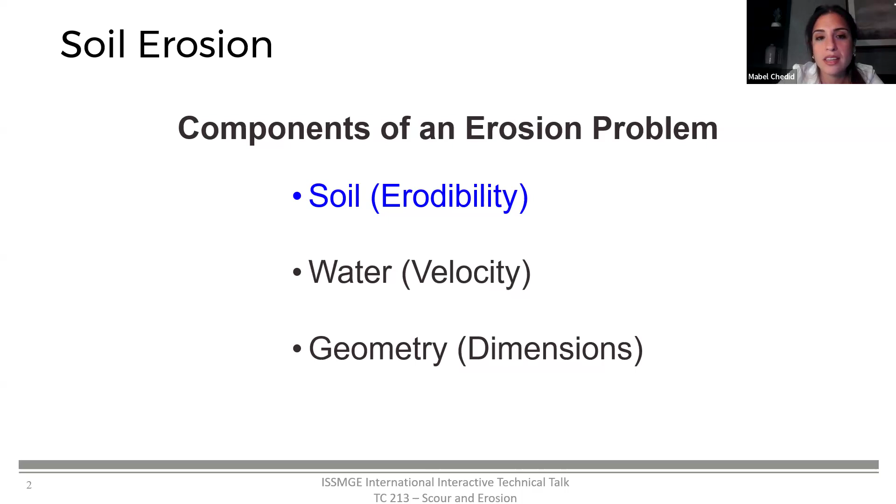Now, from the point of view of soil, soil erodibility can be defined by the relationship between the erosion rate of that soil or soil surface and the velocity or the shear stress. This is what we call the soil erosion function. The soil erosion function can be seen as a fundamental constitutive law for any soil erosion problem, much like the stress-strain curve is the constitutive law for soil deformation problems.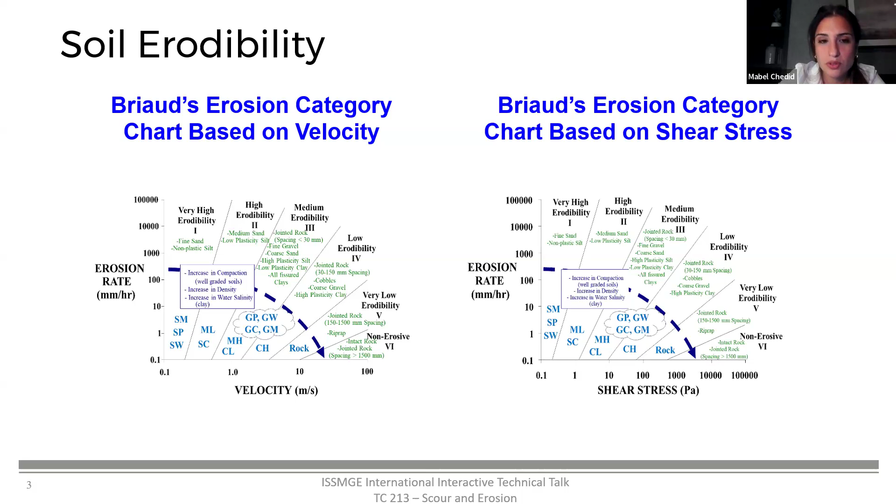So it gives a very good first idea of how resistant the soil is to erosion. But there's no replacement for soil testing in order to get the actual erosion function of that specific soil. This brings us to the list of the most commonly used erosion tests in practice and research today. The development of these tests has taken 50-plus years for the lab tests and around 10 years for the field tests.

In the lab, for surface erosion, we have the erosion function apparatus, or EFA, and other flume tests like the ASTD, the ASSET, the SEDflume, the SERF. For internal erosion, we have the hole erosion test and the slot erosion test, which are the evolution of the pinhole and the drill hole test.

Now in the field, we have much fewer tests. Most recently, we worked on the borehole erosion test, or BET, which was part of my PhD research. The BET is a very simple test. It requires no special equipment, no special expertise. It gives the erodibility profile of a soil along the depth of a borehole.

While developing these tests, we took some samples from the same hole where we performed the BET. We went back to the lab, performed the EFA, and compared the results. The remaining slides here will talk about the EFA and the BET, and will show how these two tests are in fact complementary. So first, the EFA.

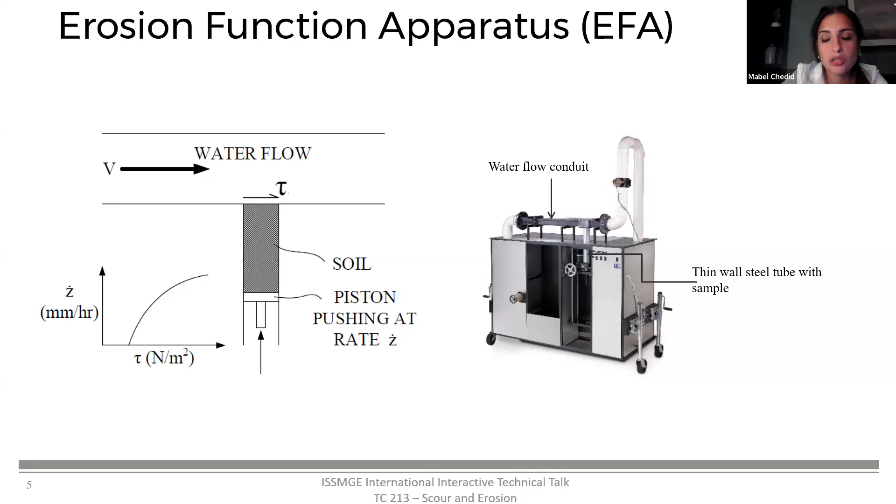The EFA test consists of pushing a soil sample at the bottom of the conduit at a speed that is just enough, or just equal to, the speed of the soil erosion. So we can then estimate the erosion rate as being the rate of advancement of the piston. For each velocity of the water flowing in that conduit, we can estimate the soil erosion rate, and point by point, we can build the erosion function in terms of velocity. We can even go from the measured mean velocity to the shear stresses using Moody's chart, and we can have the erosion rate as a function of shear stress as the final outcome of the EFA.

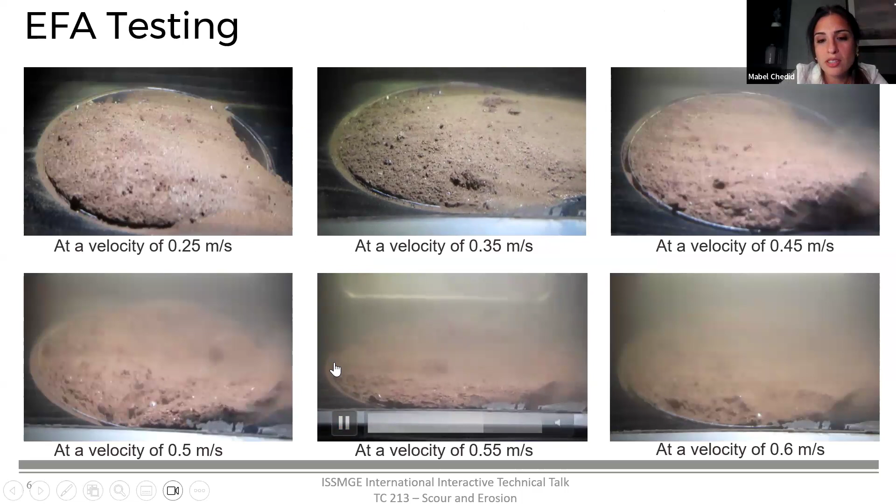Here we can play a video, for example, demonstrating the EFA on a silty soil sample. We see that at a velocity of 0.35 meters per second, there's an erosion rate, and then the erosion rate increased significantly at a velocity of 0.55 meters per second. So this is the EFA.

Now moving to the field test, the borehole erosion test. I think this test has been performed many times before without us knowing, just by drilling boreholes for the purpose of soil investigation using wet rotary drilling, which is the most common technique used for drilling in the US.

Here you have the drill bit at the bottom of hollow drill rods, with drilling fluid circulating down the drill rods. As the drill bit cuts the soil, the cuttings return up to the surface in this drilling fluid. If the velocity of the drilling fluid is higher than the critical velocity of the soil, an erosion process occurs because the drilling fluid erodes the side of the borehole, resulting in an increase of the diameter of the borehole.

We can go from the increase in diameter to the erosion function by calculating the erosion rate of the soil and estimating that particular velocity.

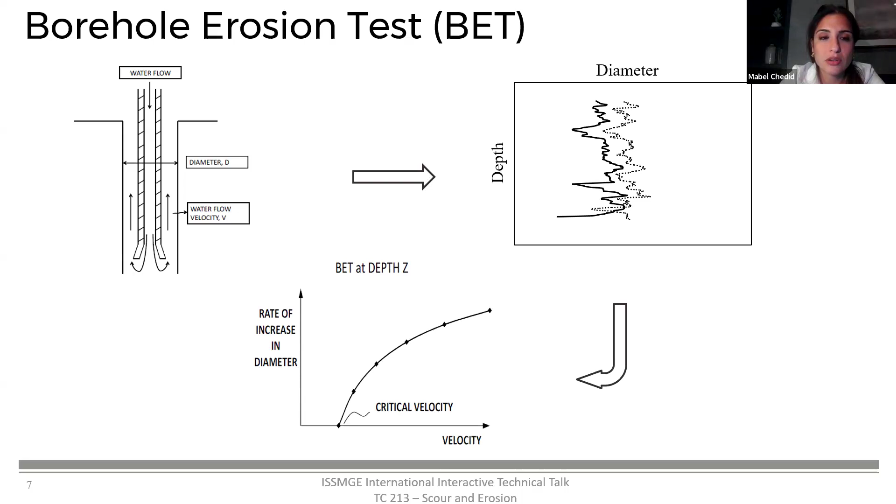The procedure is very simple. Like I said, we start by drilling a hole. A 100 millimeter diameter is enough. The depth should cover the entire depth of interest of the soil.

After drilling the hole, we remove the drill bit and the drilling rod, and we lower a caliper, which could be a mechanical caliper like in this picture, down to the bottom of the hole. Then as we pull out the caliper, we get the initial reading of that diameter.

After that, we reintroduce the drill bit and the drilling rod, and we circulate water at a certain selected velocity. That velocity of the flow would erode the borehole and increase its diameter.

So after, let's say, 10 minutes of flow circulation, we remove the drill bit and measure the diameter profile again using the caliper. We can repeat these steps and circulate as many velocity runs as we want in order to get the erosion function of the soil.

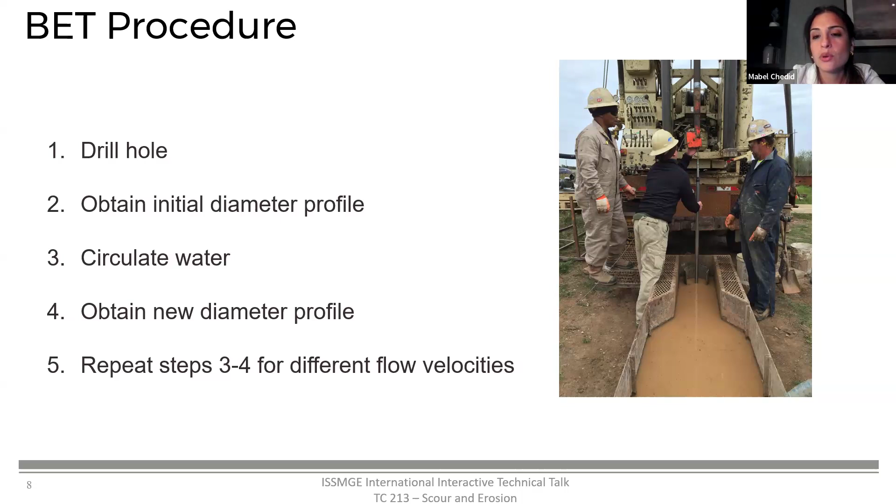So the equipment is nothing more than a drill rig, a mechanical caliper, and for the water circulation we use the pump on the drill rig, an inline flow meter, and a stopwatch to record the time of the water circulation.

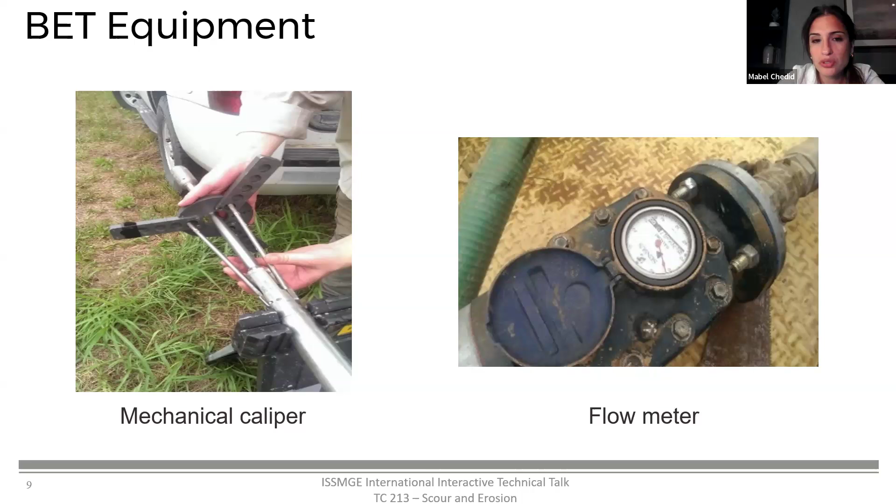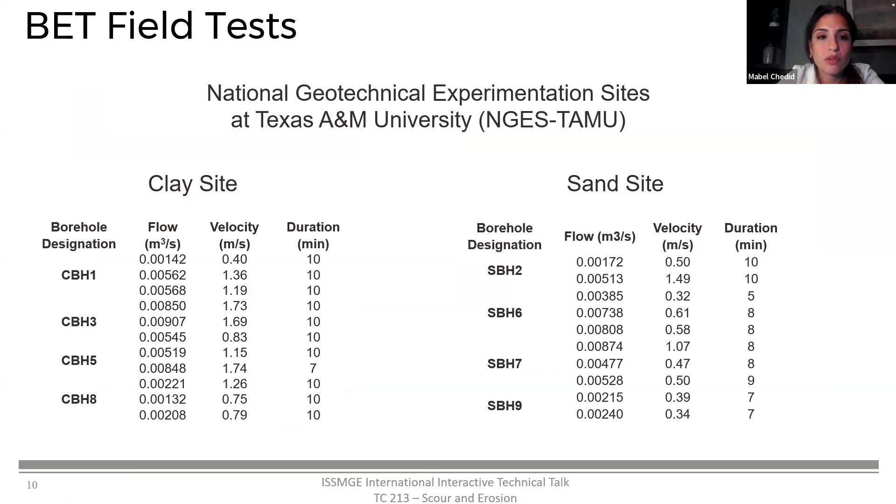We performed tests at the Texas A&M site. We have a clay site and a sand site, and we performed a series of maybe 4 BETs at each site. This slide shows the flow and velocity conditions for each of the BET tests.

So the increase in diameter was 4 millimeters, meaning the increase in radius is 2 millimeters over 10 minutes of flow. This is an erosion rate of 12 millimeters per hour, corresponding to that first velocity, which was, if I'm not mistaken, 0.4 meters per second. So this is the first point on the erosion function.

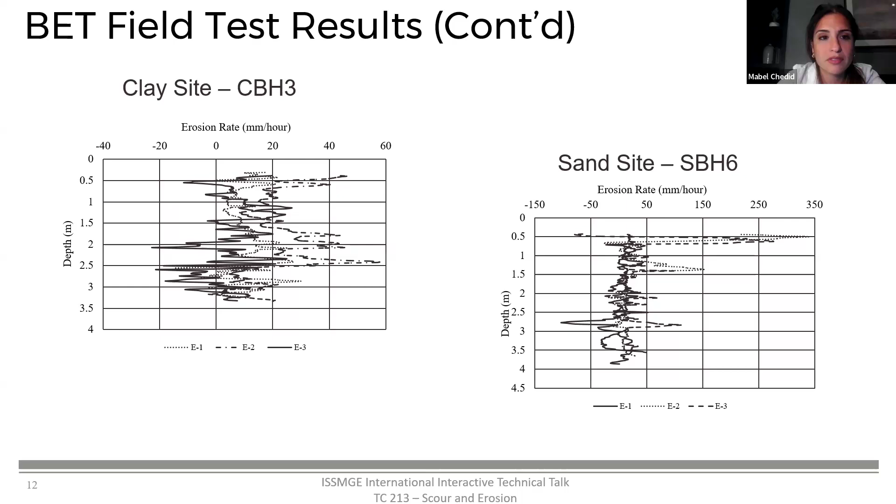In order to estimate the shear stresses, since we've been talking about velocity and the velocity of the flow, we wanted a better idea of the shear stresses along the side and bottom of the borehole, and how the velocity distribution works. So we did computational fluid dynamic modeling using the FANS numerical method.

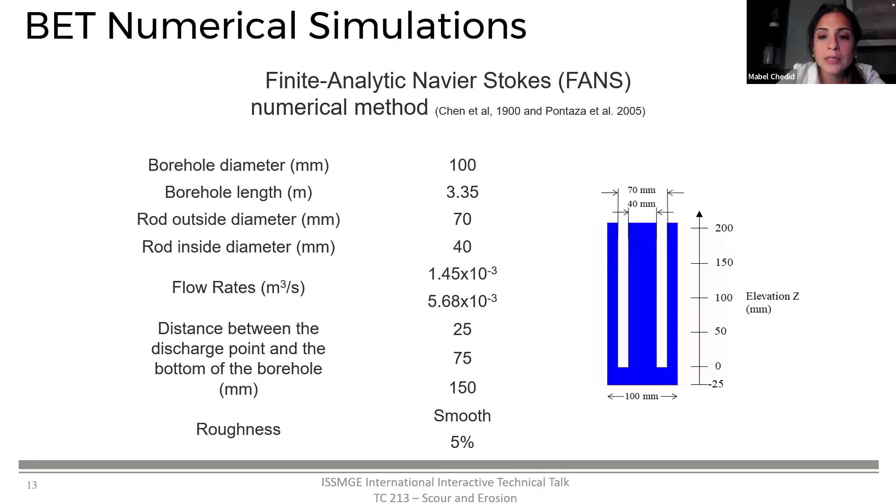This is the geometry of the borehole that we used. We simulated two flow rates, a low one and a higher one, and considered three distances between the discharge point and the bottom of the borehole, and two cases for roughness: a smooth case and a 5% roughness hole.

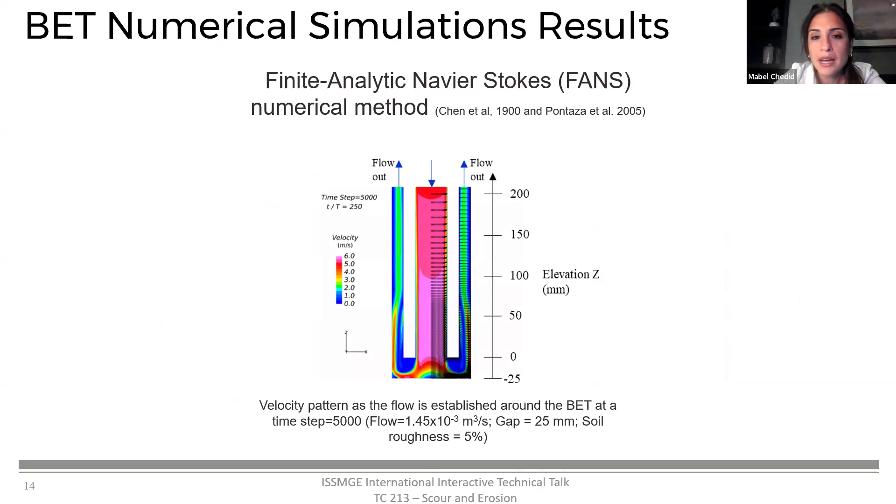And actually now we kind of realize that we have two shear stresses, one on the sides, and one at the bottom. We realize that there are two erosion processes happening. So the general BET, we call it now the lateral borehole erosion test, is the increase in diameter because of the side shear stresses on the borehole.

But we also have the bottom borehole erosion test, which is also after each velocity run - the caliper data show us that the borehole is increasing in depth. This is because of the bottom shear stresses. We can also calculate that rate of increase in depth, and we can get an erosion function as well from the bottom borehole erosion test, which is much more like a jet test.

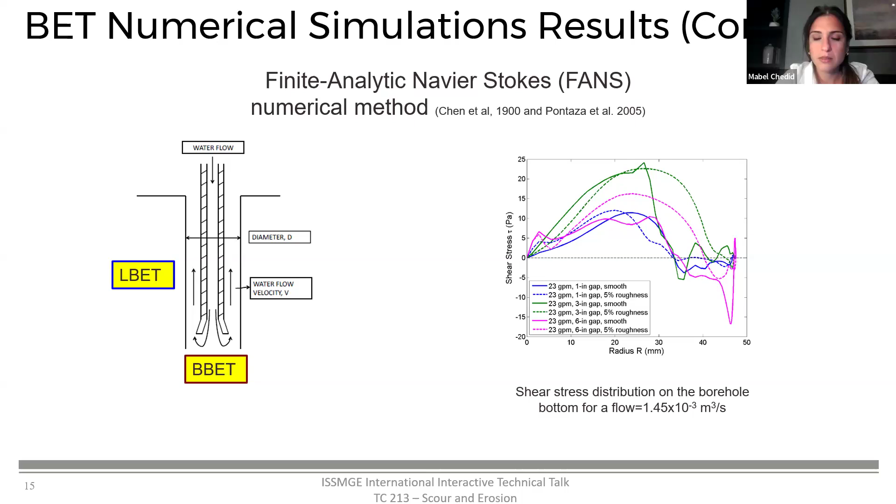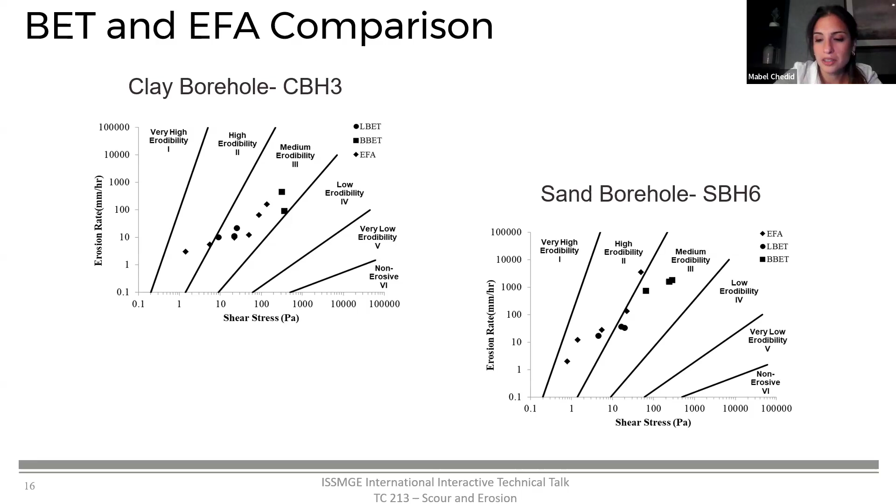And finally, a quick comparison of the EFA, BBET, and LBET. We plot the erosion function of the same borehole and of samples tested in the EFA from the same borehole, on one erosion function for the clay and for the sand. We can say that the erosion functions are kind of aligned, and we can conclude that more or less the three tests are reasonably in agreement. There is, of course, some scatter due to the accuracy level of each of the tests, but overall it is looking good.

Finally, I would like to end with a picture of me and Jean-Louis climbing Teton Dam to take some samples to test in the EFA. This is a dam that failed, and it's a very steep slope. I'm showing the picture of us standing there, but there are actually videos of us going back down to ground level using our hands and our feet. It was something, for sure.

The field is always amazing, and we have a lot in common, Mabel. We both studied at A&M, we both come originally from Lebanon, and we both have Jean-Louis as our PhD chair. That's so good. Thank you for being with us.